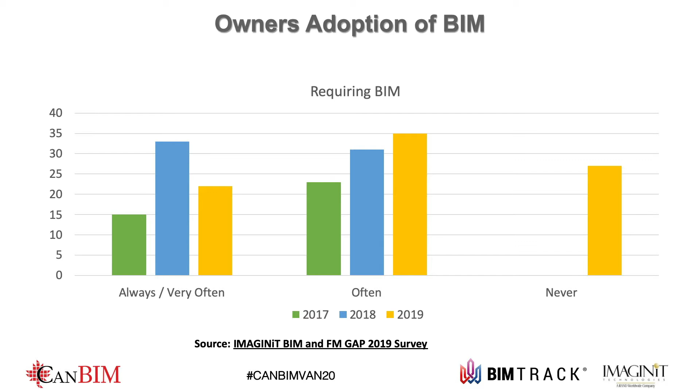We do a lot of surveys around this, and Carl and I had a bunch of stats, and I'm just putting one. So at IMAGINiT, this was year 5 of our owners' adoption of BIM survey. And what we like is that we see 2017 was a little anomaly, but in the middle, we look, where are we? And we can see that overall people are requiring BIM more. Last year we added a question and asked if they never were, and it was surprising the number of people that came back and said never.

And the irony is, as a building's built, you guys want that data. Someone used the example of 100 years for a building. I love talking to universities because universities will have buildings that are hundreds of years old, but the data that is in them is going to be important to you.

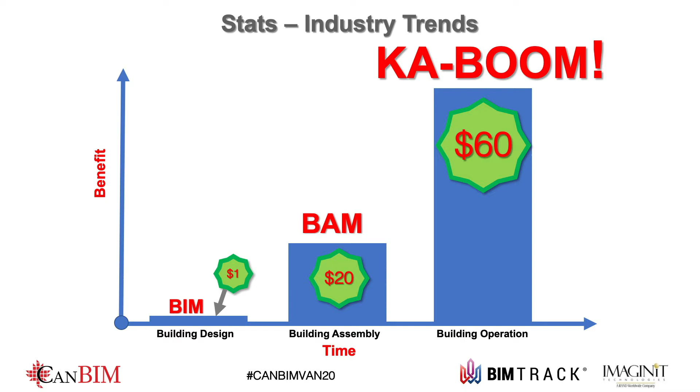So on the AEC side, I'm sure we've all seen something similar to this graph. I saved you the parallel of the MacLeamy curve this time, I know we've all seen that before. But what this brings into place is what we do, where we spend our dollars when we're working on a design. So of course we've got that first dollar, we've got the little BIM in the room when we're doing a design, we put it in place. And then that brings in the actual time that we're assembling, so we get into the BAM to put it into place. But really what it comes to is when we look back to our friend Marvin, which is kaboom! And we've got that big thing and everybody's awake now.

But we see that the major amount of money that we put into this is actually at the owners and operations stage, we're putting it into place. So we need to start thinking on the AEC side, how do we tap into some of that? And how do we make sure that the owners we're working with have the best building, the best ability that they can go forward with all of that information? And as Peter says, that all comes back to the idea of having the data.

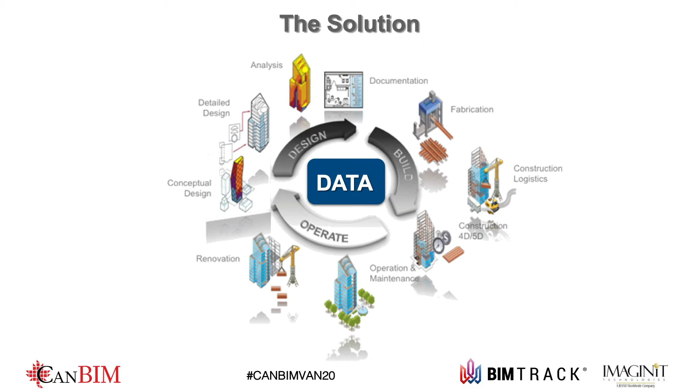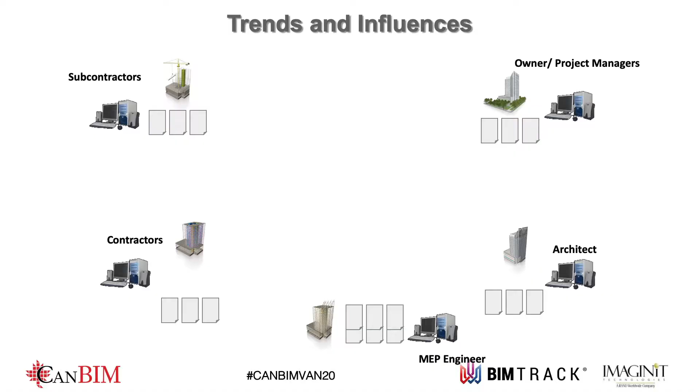So as we start working through that, one of the problems we come into when we're looking and focusing at the data is the idea that we have all of these people, and we've all heard it, we've all said it before, working in these silos. So we all have this information, we're sharing this information as it flies all over our job sites. Hopefully we'll have less and less paper, but even 10,000 PDFs that have 60 different names don't make this process any easier as we're working our way through. So we're going through the process, we're sharing our information, we're passing it back and forth, and eventually Armageddon comes into place and stuff's going everywhere and we have no idea what's going on.

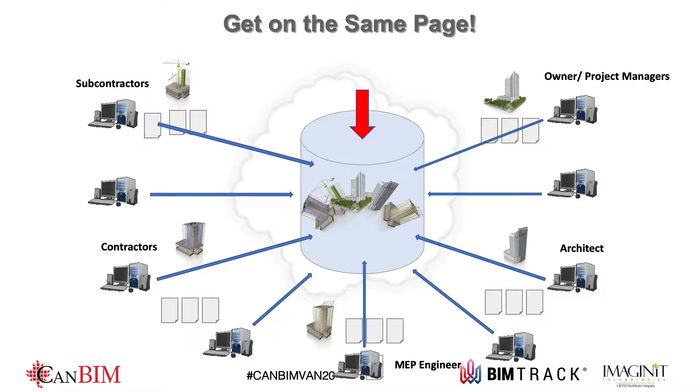So the idea is that we want to be able to have everybody on the same page. So we have all of that information, all of that data that we've harvested from the very beginning when we were doing our conceptual design models, bring it all the way together to when we're actually doing our working documents, to when we get into actually building the documents, and we have everything together. And when we start to get the owners involved in that process, and we have the ability to bring them into that hub and share all that information early on, it makes the whole life cycle that much easier as we go along.

I love it when I hear someone from the UK speak about this, maybe it's the accent, but the British people I know are extremely smart. They've really thought about the process of what to do with data and data flow. They're well ahead of a lot of the rest of us, but I like that there were no acronyms - in the PowerPoint version there's an acronym slide. The fact is, if you talk about the data and make it in consumable pieces, parties can understand it so you can work together.

As we talk about data, I'm going to shamelessly plug the solutions I sell because I've worked with them specifically. They're not special, but when we talk about BIM, generally we kind of think we're talking about Revit, right?

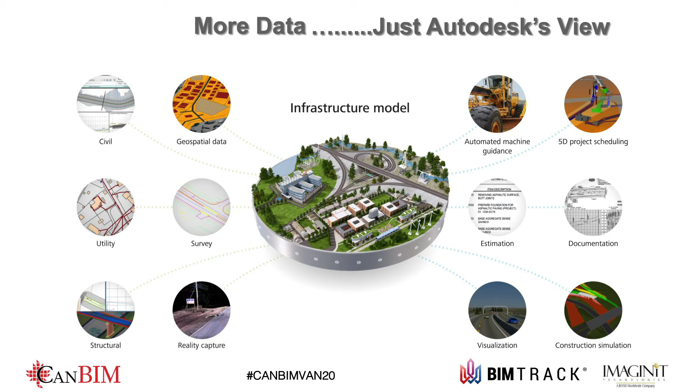There's a lot more data out there, and it's going to increase, and there are going to be sensors all over the place. I have a sensor in my pocket now, from Apple, called an iBeacon. It knows I'm here - I can show you in an app on my phone. This has nothing to do with buildings. So as we start talking about buildings, we think about assets, but there's a whole host of things that will be possible as you take this facility data and integrate it with other things.

There's a very simple rule in IT: if you have data, someone will find a way to write an algorithm to get information from that. I loved the example from the keynote - when he used the example that they come to us with these data sets saying, 'hey, is there something you can do with that?' And he's like, absolutely.

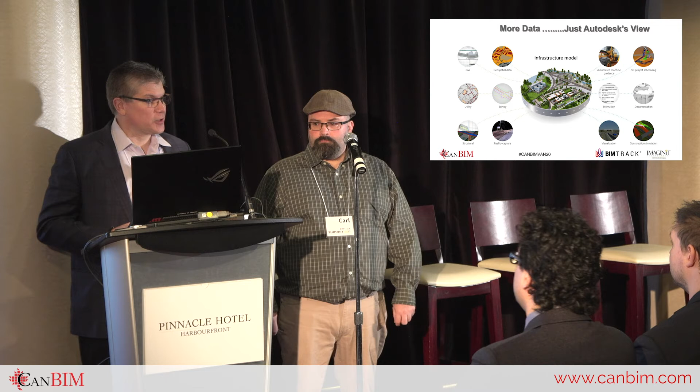From a data perspective, you've got to think about what data do you need. If you're managing a hospital, we need to know a certain amount about the facilities, the rooms, and the infrastructure, and then we've got to know things about the assets. The next question as you go to create your database is, how are you going to collect it?

I see this as one of the places where the UK is very far ahead of us - they were going cradle to grave, thinking about how to look at this. But as you're moving along, what cracks me up when I talk to a lot of AEC professionals about BIM is they think the model is populated in a nice little desk somewhere with some engineering software. If someone's putting assets in this room - let's say we wanted to track these lights individually, so we put a barcode on them - that's not going to get done in the office. That's going to be done by some tradesperson.

So the second question is, well, who's going to collect it? As you look at that, you're going to deal with different types of people as you watch the data flow. The third question is the best: how will it be kept up to date?

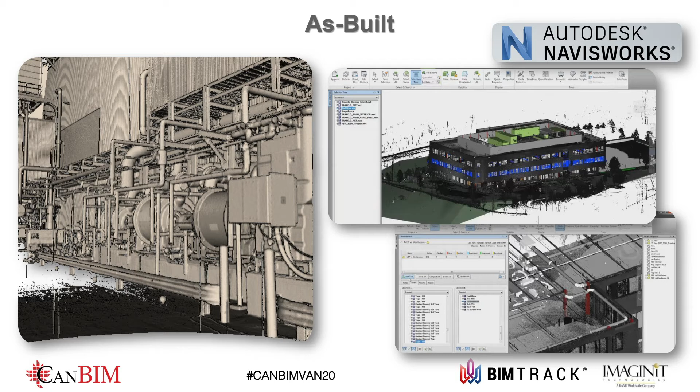So, of course, one of the things that's going to come out of this as we're working on the AEC side is the as-built, that document that we always deliver 100% accurate all the time — this is where we all laugh because we know that's not true. But hopefully with the technology and the idea of passing along this data, no longer being in our silos and really passing that along, we get a little bit further along where these as-built processes can actually be something that we can share and use as we work our way through, whether it's using something like Navisworks or any other program out there that allows us to share that information. And as Peter pointed out, to keep it up to date, that's the key. Those documents we have in the back room that are outdated are just as bad as a model in a format that's 10 years old that we can't open anymore. So we have to keep these things current.

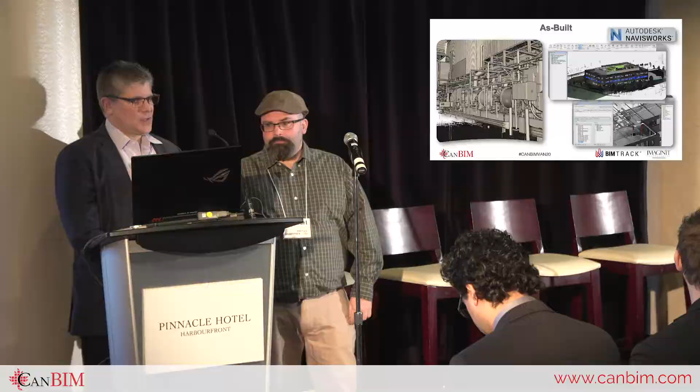So let's talk a little bit about working with different types of data. There are going to be some standard data sets that we're going to work with. So we're going to ask, how do we look at this data from a design perspective in Revit? How do we look at it as we start to go towards that cloud? I usually make fun of when you see the cloud appear, right? When everything came together, the angels come out, someone goes, oh, it'll be up in the cloud, it'll be fine, right? No, it doesn't work that way. Let's talk about what a standard database is and show you some things that we've done with that. Talk about facility management systems as a whole, and then talk about different ways and methods to start to pull this information into your system so you can make better decisions about your facilities.

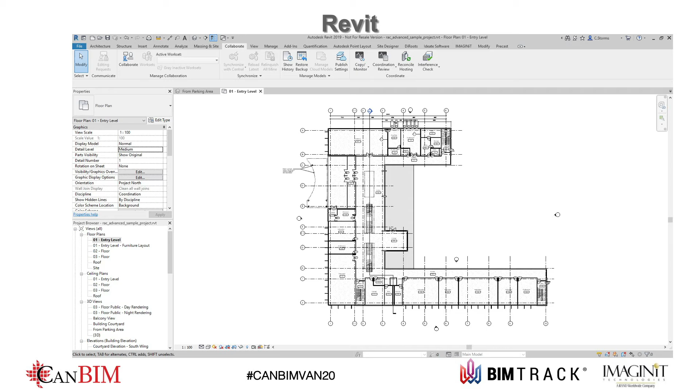As Peter said, one of the formats I'm more comfortable with is Revit, so I'm speaking about it specifically here. But any building information modeling software or proprietary system will do the same thing. The idea is we have the ability to work in the proprietary software, an RVT file, but we also have the ability to export out to an open BIM format, IFC in this case, ensuring information is usable throughout the project's life cycle.

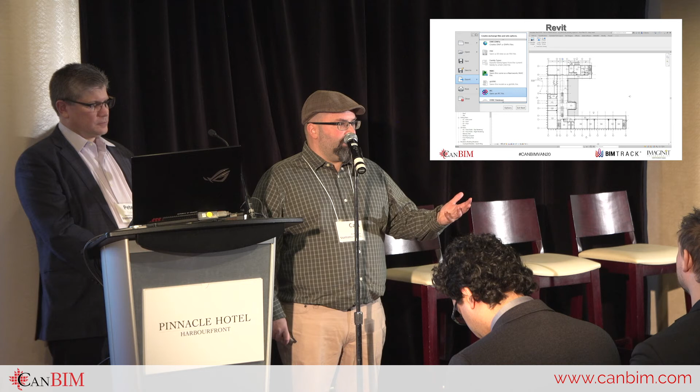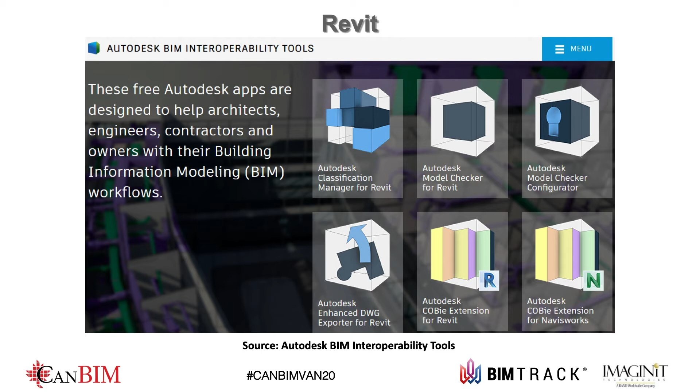Another thing Peter's going to go into more detail on is something like COBie, where we have the ability to start tracking our assets and information at the beginning stages, working inside that model for design and for construction. Autodesk has some free tools for this. It's developed by Autodesk, which helps the process. It allows us to work with COBie information inside Revit and inside Navisworks in this case - very helpful information.

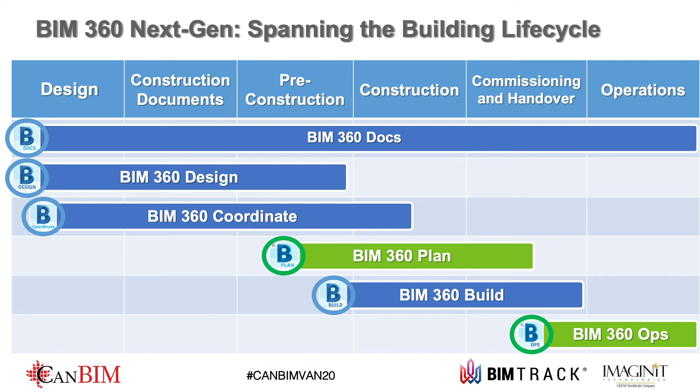We also have BIM 360, and lots of other platforms out there - shameless plug, like BIMTrack - that allow us to put these things in place to see what's going on. One thing I'd like to point out about this slide, which I use often, is that I like it to look nice, so everything's in its own little silo, its own container. But I think we can all agree the amount of time we spend on design versus operations isn't equal, so take this with the grain of salt intended. We have all these different platforms working together, each with their own niche inside the design phase and building phase, and they carry us on to operations at the end.

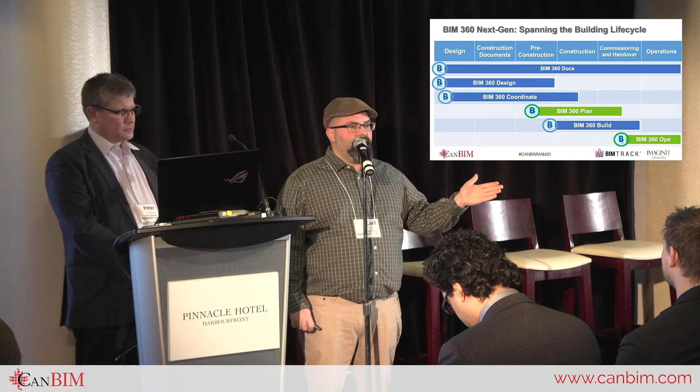The idea is that they all work together in that cloud Peter was giving a little jab to. The idea is we have one spot, in this case BIM 360 Docs, where all this information is available. The key there is we now have the ability to share the data with everyone involved, and we can pass that data from design to construction and then on to the owners as we work our way through, whatever that platform might be.

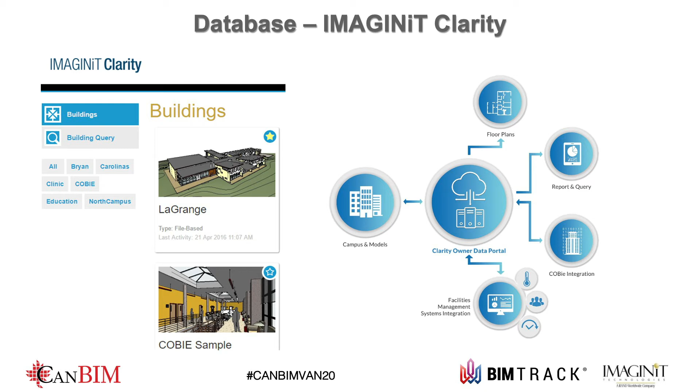We're just at the beginning of seeing how that data is going to be harnessed. We have a product called IMAGINiT Clarity that works with Revit - it's a task automation engine we work with design companies for. We repositioned it recently when we realized most owners didn't know how to get their data out of BIM. With our Clarity product, this was like a couple days of programming - we take the data out of the model, put it in a database, and you can report on the data. It's not a big deal.

What does become very important, as you think about your multiple buildings, is what is in those models - back to that standard we mentioned earlier. But it's not that difficult, and there are like 20 products that do what Clarity does, so again, it's not special.

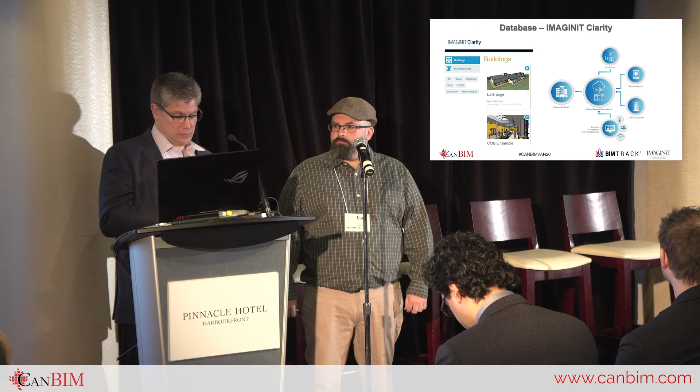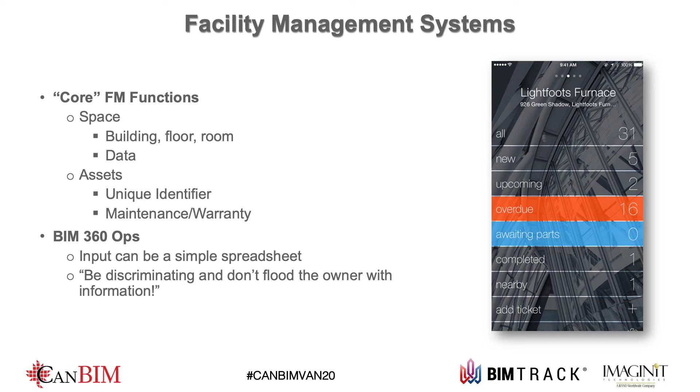In facilities management, I use a very complex term: where's my stuff? The core functions of FM, if you think about it, are what space, spaces, or areas do I have, and what do I need to do to maintain that space for whatever feature and function it has. Space at a database level can be broken down to building, floor, room - it's just data. From an assets perspective, you can have a unique identifier on things, like the barcode we talked about earlier, and that allows us to track additional assets and tie information to that.

Part of 360 is a product called Autodesk BIM 360 Ops - a very simple, easy to use work order management system, or CMMS. When I asked the director for her perspective for this presentation, she said, ironically, most data is entered from a spreadsheet. Part of the reason is because we don't have BIM as-built as owners. Raise your hand if you're an owner and you have lots of BIM as-built.

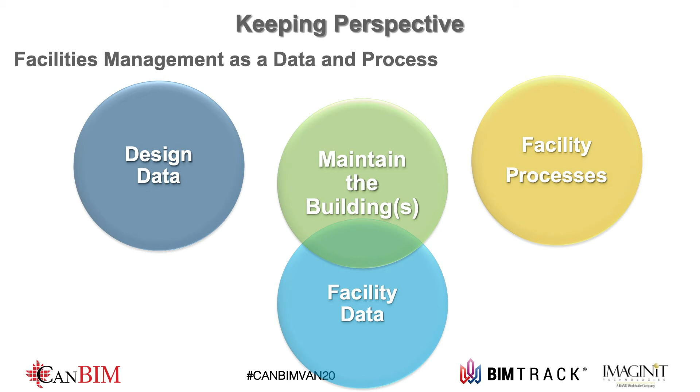Raise your hand if you're an owner and your AutoCAD drawings are up to date. Forget about Revit, right? Okay.

But it was interesting what she said. She said, we do a lot of stuff with spreadsheets. And her advice when she talks to AEC professionals is keep it simple, stupid. Don't flood the owner with a bunch of information. If you can show them day one where their assets are in their facility, it's really helpful. Wouldn't you like to know day one where your assets are and details about them? There's no reason that you shouldn't.

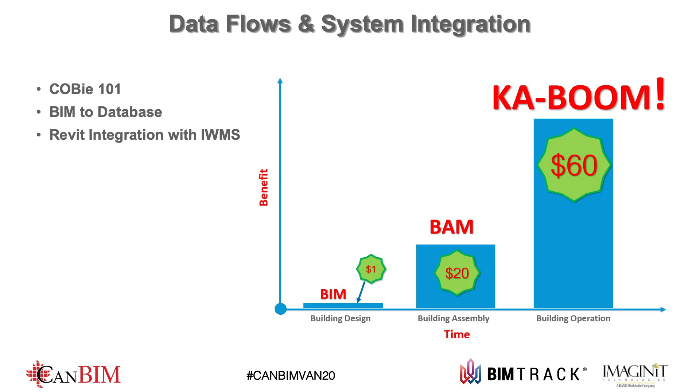So we're going to talk a little bit about data flows in some ways. So has anyone in the room heard of COBie before, the term COBie? Okay, so I'll go over that really quick.

I'm going to show some examples of BIM to a database, and I'm going to show an example of integrating some BIM data with an IWMS, in this case, Archibus. I want to be clear, neither Archibus nor Revit is special, just data as far as I'm concerned.

Kaboom! Just making sure you're still awake. Also, this is where the money is. It's like that Jerry Maguire thing, when he jumps on the desk and he's screaming, show me the money. That's what an owner should be doing to their AEC professional. Conversely, the AEC professional should be coming to the owner going, I can show you the money.

So COBie stands for Construction Operations Building Information Exchange. It's just a data format. There are different levels you can have it. You can have very basic information, like my facility floor, or you could have complex information. What concerns me greatly about it is it's usually delivered in a spreadsheet, and then the architect thinks it's a spreadsheet. Well, God bless them, nothing wrong with them, they build beautiful buildings. I have a degree in physics. If I built buildings, they'd be square, and everything would make sense, and the world would be incredibly dull.

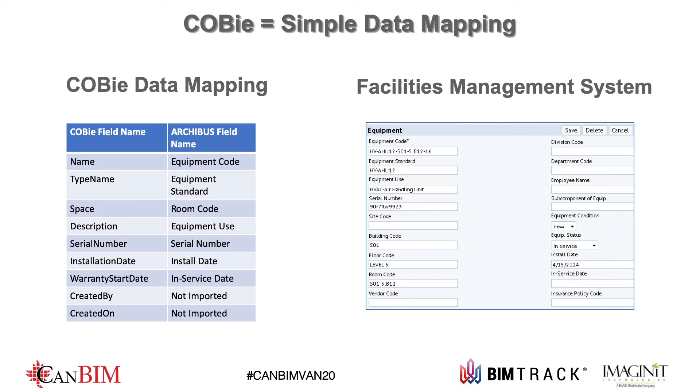So we just need to go back to that progression. But here's a simple example in Archibus where we're taking—and Archibus could be any system, right—basic COBie elements, matching them to a database, and entering them into a system. The only thing that's important here is that we have consistent naming standards. Your IT department has that covered.

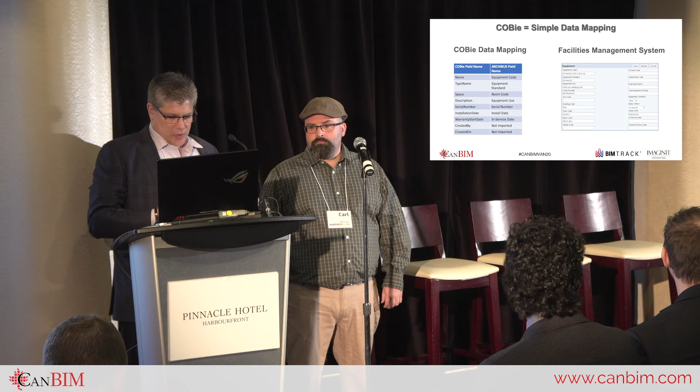I kind of talked about clarity before, right? So from clarity's perspective, hey, let's pull up some basic information on a room. So at a pure database example, here's something else that can be done. In this case, this will be our longest slide. This slide, by the way, is from 2014.

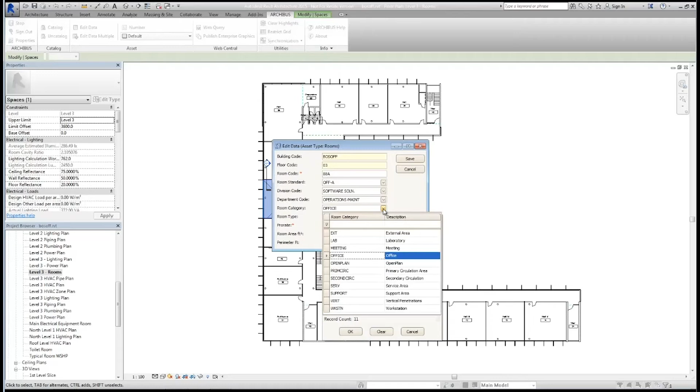In this case, it's Archibus. There's a plugin that's running inside of Revit, and look, I pulled up a window, and you can see that there are data elements in a database that are linked to this model. Also, as you look down, you can see that you've got a pull down, so you can't get bad data—another IT process they put in there sometimes, right? Makes sense. Let's call a light bulb a light bulb.

Inside Revit, this isn't rocket science. This data exists there too. In Revit, we don't call it a database field, we call it a parameter. You can set up a simple mapping from one to the other. Again, 6 years old, not rocket science, old technology. We can do all sorts of things on top of this today, and the uses are going to keep coming.

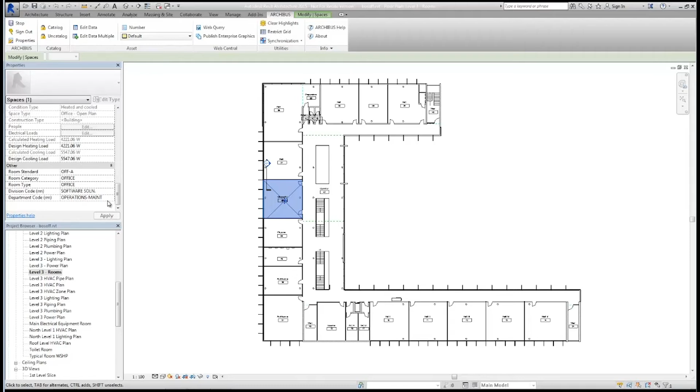As you come along, we can also look at this from an asset perspective. So the current term in the asset management world, everyone's talking about an EAM, right? Complete life cycle of your asset. So we can click on an asset within the model, link that to an asset management system, and start to pull up information about that. Okay, so as we go along, we pull—I'm going into my system here, and I can look at life cycle costs.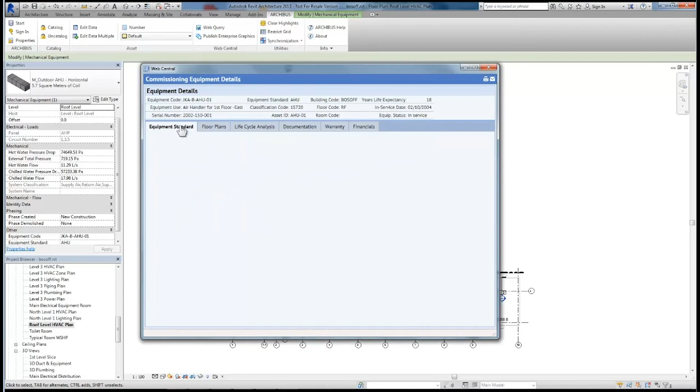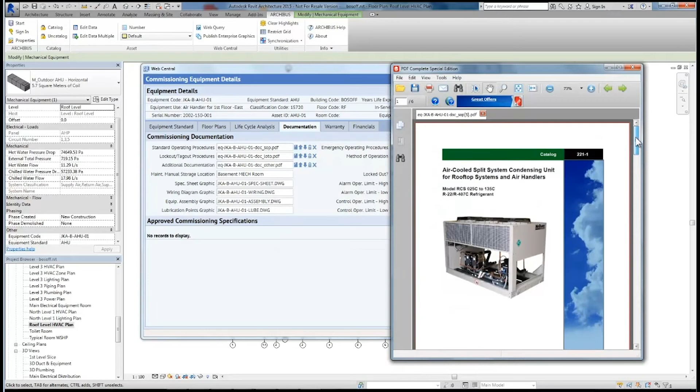I can look at details about this, and I can pull all sorts of information in to make good decisions. The other point I want to make about this slide is I love getting salesmen from different software companies that integrate in the same room, because they argue about whose system the data should be in. Should the data be in the BIM? Maybe. Should the data be in the database? Maybe. They're going to be different places, and there'll be some data that's bidirectional, some that's separate. The good news is your IT's already figured this out for your other systems.

Sometimes there are a lot of AEC people in the world. I got to explain to them that you guys are stressed and over budget. Under budget, right? Anyone got good budget? Raise your hand.

The other thing I want to stress as we talk about this data, there's tremendous focus from the C-suite on facilities, because facilities are expensive. IT's caught up with you. And as we look at this, there are all sorts of ways to use this data. I want to give you a couple simple examples.

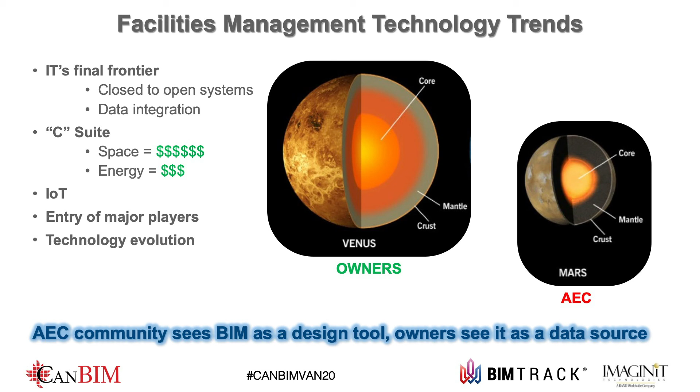In this case, I'm using Archibus to pull in BIM data together. Here's a floor plan. Who polylines their floor plans? Raise your hand for space data. Revit, you don't need to polyline. Darn it. I'm connecting it with a simple database. I'm doing a table join, and I'm then taking that data in that table join, linking it to Esri or Google Maps or something to look at it differently.

I can drill down and look at data and start pulling energy metrics. I can look at maps differently, and stacking charts. I can start looking at my floor plans and how I arrange things. I can start looking at things in 3D and drill down into the asset and its subcomponents.

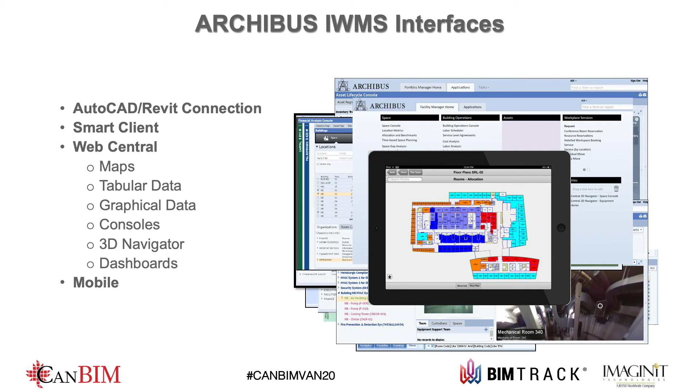And I really like this slide because this here is a point cloud. We have a point cloud - shoot, that's better than Revit or AutoCAD or anything. You can have an actual picture of that. And then you can start to do all sorts of complex analysis. Like in this case, we said, hey, this is a lab environment, one piece of equipment services this. What happens when it goes down?

Simple data examples, 6 years old. I really should update this deck, but I don't, on purpose.

So as we can see here, kind of the idea, as we're bringing this baby in for landing, is the idea that we want to get, as Peter said, so that we're all in that AEC owner win-win category. And from the AEC side, what we need to look at is that we have the ability that we've created - we spent all this time creating this model, this living document, this data.

What if we talk to the owner and say, hey, we're the ones that are willing to, for a fee of course, keep this up to date, make sure that you have the latest and greatest in there. Keep those relationships going so that we pass that along. So think of it as a way to have a revenue stream, a way to have repeat business. We did that for that owner, they really liked it, they liked the system that we did when we were working with BIM. Let's work with them on the next project.

So those are the ways that as AEC professionals, we can start looking to take advantage of BIM to be more akin to the owners and have them reuse this over and over again. And from an owner's perspective, this can be invaluable, because you can make better decisions over time. There's an IFMA calculation - I always mispronounce it - but it's at least 20% of all preventative maintenance is done on equipment that's under maintenance warranty. No one's tracking it.

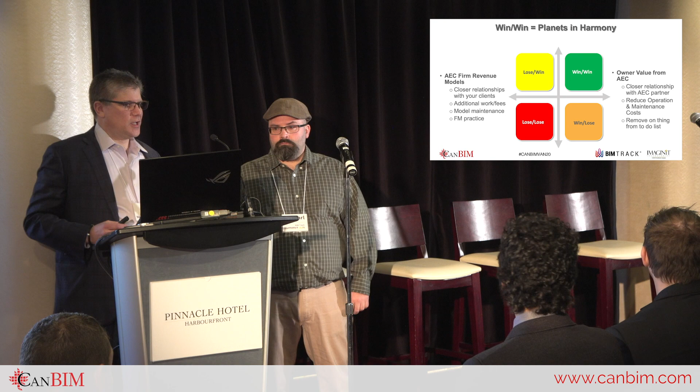So in the end, I like Dwight Schrute. I like keep it simple, stupid, because I can explain it. I hope I didn't hurt anyone's feelings by that.

And as Peter said, as we will reiterate, it's really about those three questions. So what is the data that you need? How are we going to get it? And then how are we going to keep it up to date? Those are the three things that should become your mantra for what you want going forward. And then the last thing, if I could just add to that - after that, go talk to your IT department. Everything's a table join, because you can add data elements so you can start with a simple model.